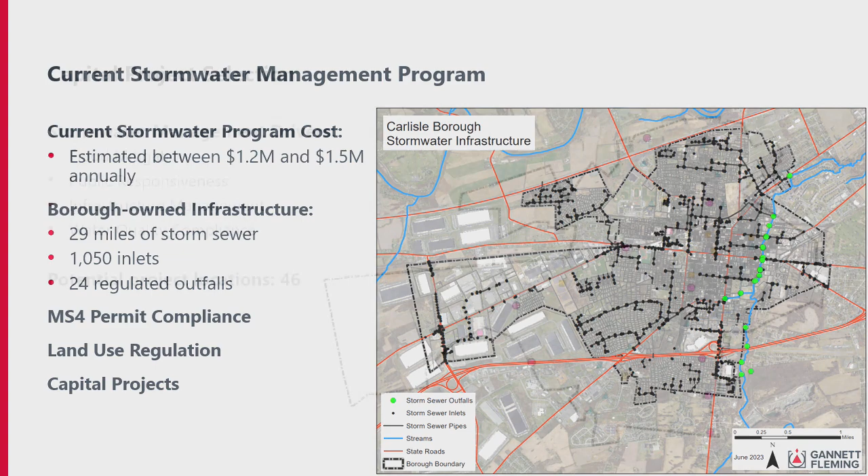Your drivers for stormwater management in the borough include flood mitigation - the Letort Spring Run has an impact, and we looked at how much backwater came out of the run and into the neighborhoods to see if that had much effect. We found it really did not, but it's something we were able to study. Public responsiveness is also a driver - you want to make sure that if someone asks a question about stormwater, or a developer or landowner has a question about what stormwater management means for them, you can respond to that.

Infrastructure management is about making sure that current investments, which might have a 40 or 50 year lifespan when installed, still operate as designed. That's the best investment: keeping what already exists working the way it's supposed to work.

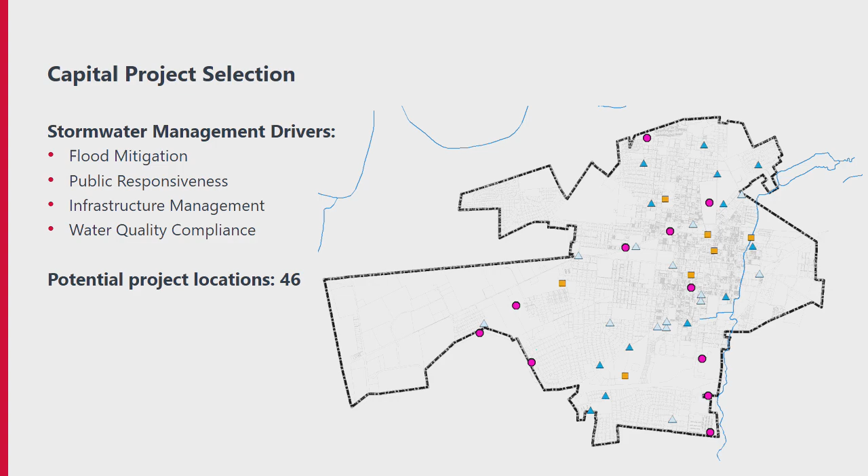And then there's water quality compliance with the MS4 program. We found 46 locations where there could be a capital project, in addition to all the other required activities. Some of those are based on the flood model, the watershed model we installed. Some are from emergency response, flooding reports from emergency responders that we brought into our database of projects. You can see they're sprinkled all throughout the borough.

We looked at some priority factors and general factors for how to prioritize those 46 locations. Some we were able to combine, since they share a piece of infrastructure, that becomes one project. So we were able to condense them and define them a little better.

These are the priority factors. They were weighted a little higher when looking at the stormwater management program, in determining what projects should rise to the top.

I wanted to point out MS4 permit compliance—I'll keep coming back to that tonight. I just want to throw a number out there: 158,000 pounds of sediment discharge reduction is the goal for the borough. That's one metric, and a lot of these others aren't very measurable, but that's one measurable responsibility the borough has for the MS4 permit. The rest have some subjectivity in measuring and prioritizing, but this was part of the factors we used.

These are the factors we used.

So where did this land? If you can see this, we've got seven different projects that landed as the highest priority. Some are water quality, some are flooding, some are community development—there's a big mix of different projects. We'll get into those 7 in a minute.

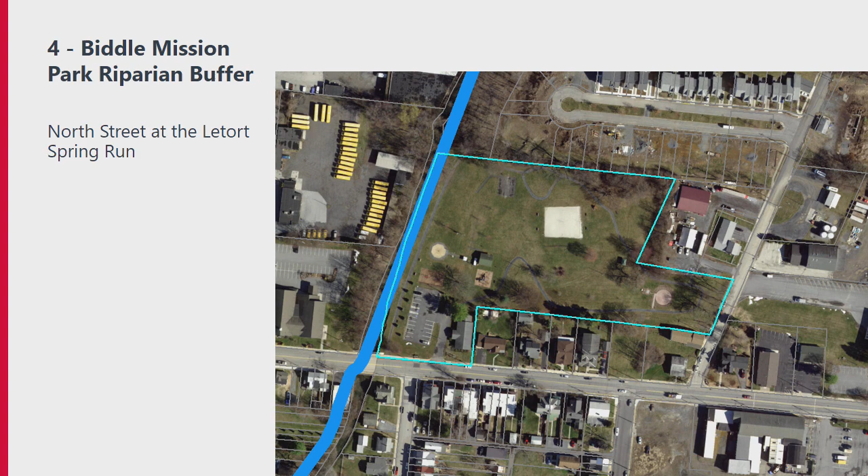This is already in the 2020 pollutant reduction plan that the borough adopted and was approved by DEP several years ago. If you look on the left side, the Letort Spring Run goes from south to north on this photo. Currently there's a trail right nearby, and so we saw that as an opportunity. It is in the existing plan to extend the riparian buffer, the stream bank buffer along that.

We took a look, and it's very stable at this point, relatively stable, so it's not a candidate for stream restoration. That's what a lot of municipalities are using, stream restoration, to make up their sediment reduction goals for their MS4 compliance.

But what it is helpful for is extending that buffer, moving the trail off the bank, reducing the intensity of use right on the bank, allowing that riparian buffer to stitch everything together, to suck some of the nutrients and sediment out of the stream as it goes by, improving aquatic habitat. Then what we would do is relocate that crushed stone pathway, about 500 feet of it that parallels the stream, off the stream bank, and limit stream access to allow that riparian buffer to really do more and gain that credit that the borough is looking for.

So there's that number. Remember that 158,000 pound number I was using before? This one gets you about 600 pounds of that. But we're going to get there.

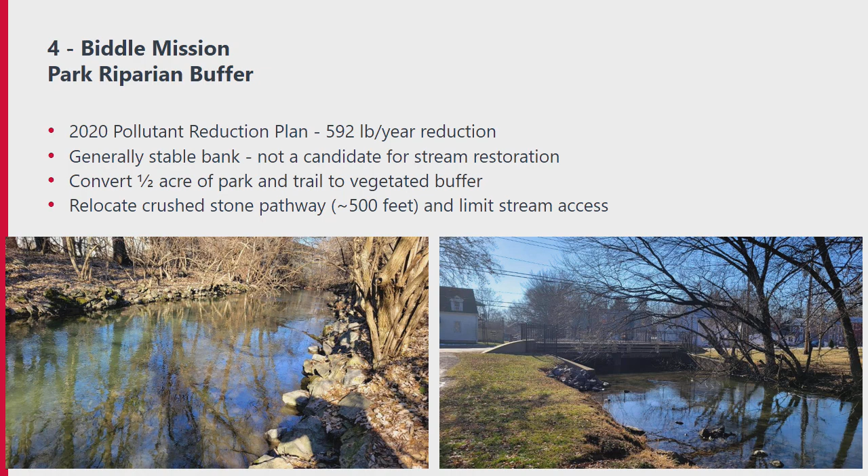And it's a dry detention basin. Water comes in, water goes out. Doesn't really have much of an infiltration capacity. Water coming in looks a lot like the water coming out.

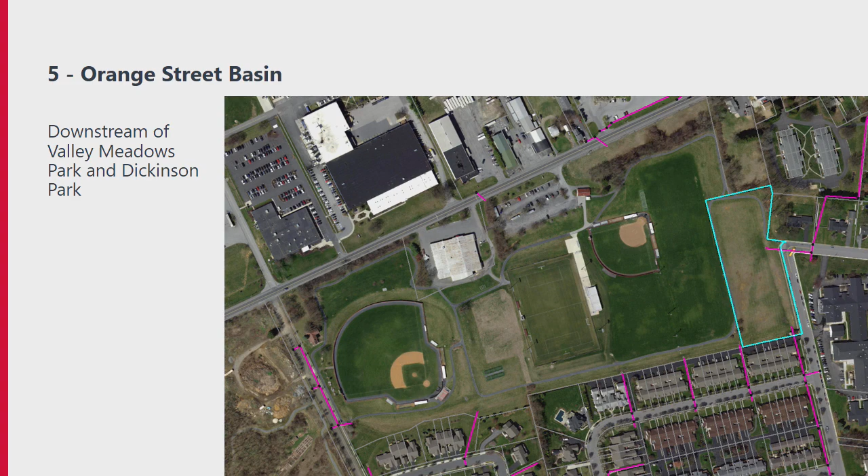And there's a lot of capacity there given that huge watershed area to change that around. I don't have the exact drainage area, but it's lots and lots of acres draining to that.

You use that basin differently, you naturalize that basin. And remember that 158,000 number? This is preliminary, this is what your pollutant reduction plan shows, but this is 60,000 pounds of sediment reduction coming from a facility like this. I don't know if we'll get to that number, it takes some study, but that is much more significant.

So it would convert it from a dry pond to a wet pond. There'd be more habitat there, different kinds of plants instead of turf grass. Right now that facility is really not used, so it would make it a more functional use of that landscape for water quality. You could also use it for education, which is part of the borough's goal for stormwater and environmental education.

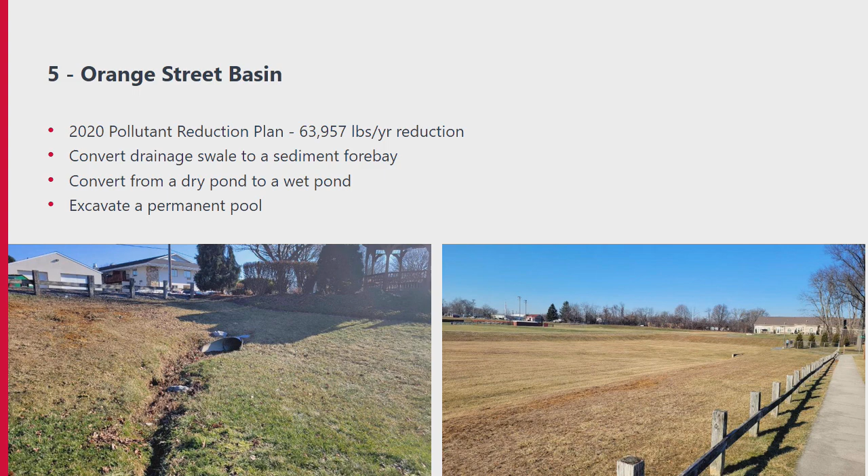It also has some potential to mitigate flooding downstream. That wasn't really a concern or a goal of this project, but it could help with flooding by just taking the top off those peak flows. So that's the Orange Street Basin. And then the third one we want to look at is Thornwald Park.

But there's potential there to simply restore stream banks, stabilize trails, add a few rain gardens, maybe put in some bioswales, maybe do some very significant excavation to create stormwater detention, retention, infiltration at this site because there's a lot of room. We don't know exactly, but there are multiple benefits for active recreation, for passive recreation, for public access, for flood mitigation, and for water quality.

So there's a lot that could be done here that we really think the public should be engaged in saying, what does this park look like in the future, and how can it be used for managing water in the future? So at public meetings, Thornwald Park is a wide open canvas of what could happen at this place. Also downstream is Walnut Bottom Road.

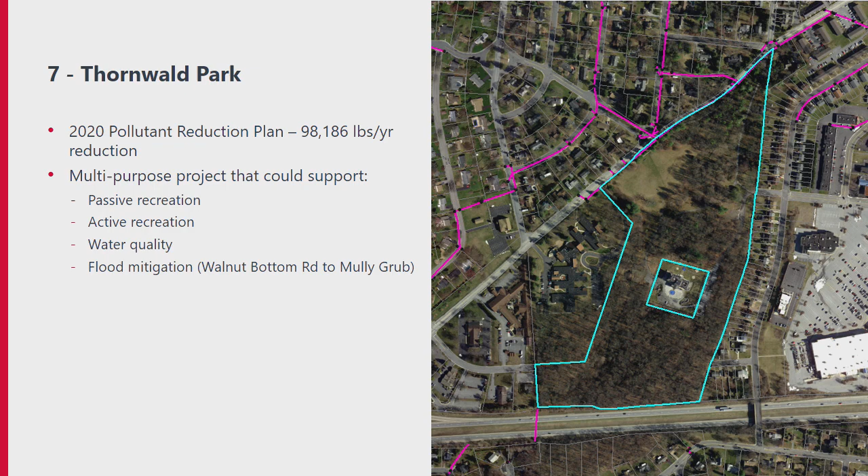There's flood mitigation because we know that downstream of this is another critical area for flooding. There may be ways to use this facility to mitigate flooding down Walnut Bottom Road as well. This is where this heads.

This is the number 6 that you were talking about before. This is the Mully Grub storm sewer. This is the water, the flood inundation areas as it goes through this neighborhood. Thornwald Park is off down to the bottom left, which drains up and into this area, and then it drains out to the right of the photo on the Mully Grub down by the park, eventually into the LeTort Spring Run.

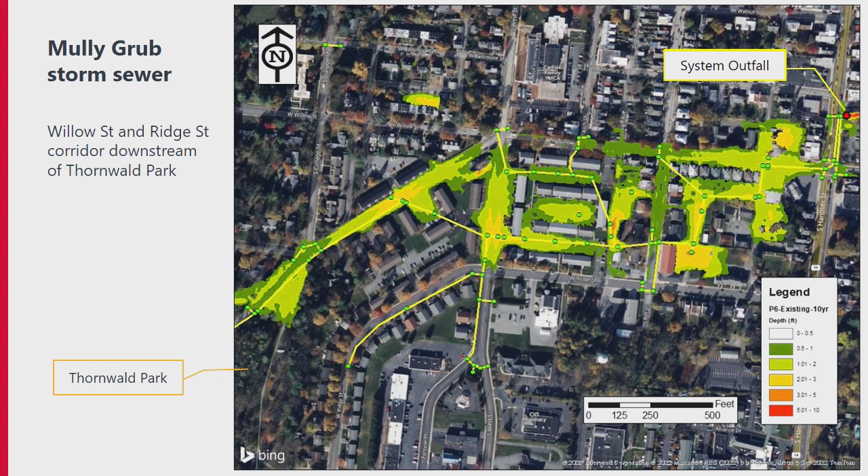So there's a lot of flooding that could happen here. It's a vulnerable area. One thing we did want to show you is the modeling that we did go through for mostly the entire east side of the borough. It's a model like this.

Please don't look at this, but our modelers can use this to say, hey, if we tweak this pipe here, or if we add an inlet here, or if we route water a little differently here, these models are powerful for areas like this to really say, this investment in this location will have this kind of impact downstream or upstream. So there's a lot that can be done here using the existing model that we've created over the last couple of years for the entire east side of the borough to dial things up and down to see how investments in infrastructure can impact flooding up and down the watershed.

So the recommended next steps: that will come in tonight with a stormwater master plan, the Biddle Mission Park, create an existing conditions plan, make sure you know where the wetlands are, the sensitive features, and then a plan for trail relocation and riparian buffer design.

The next one's the Orange Street Basin. Again, existing conditions plan, infiltration testing to see how much water can get put into that site, how much has to run off, and how much can sink down into the groundwater. You can just get rid of it that way. And then the design and the permitting for the earth disturbance would be the next step there.

And for Thornwald Park, again, existing conditions plan, but very different look, much higher level look at that. Concept design for what could be done: stream restoration, green infrastructure, detention, retention, infiltration, flood mitigation. There's so much that could be done there. But to get the right people out on site to walk that and see, these are some options for Thornwald Park, and then engage the public on those ideas.

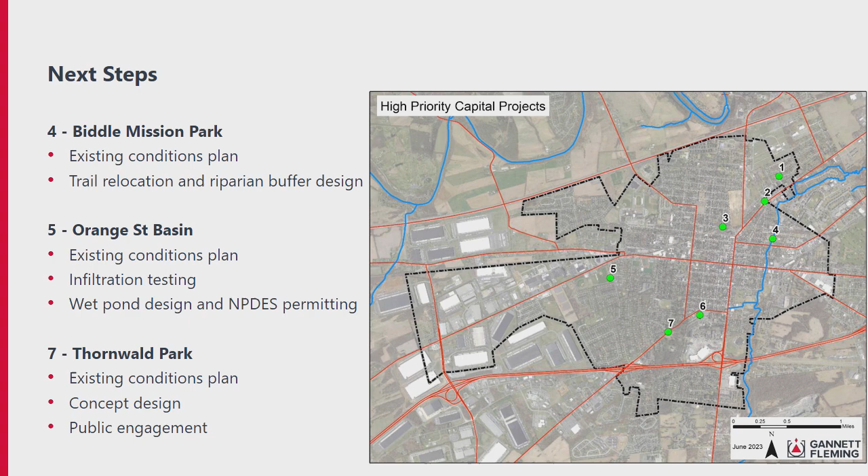So those are our proposed next steps. There's a lot more in the plan about the prioritization, about the borough's current stormwater activities, projections into the future, other activities that could be done as far as site assessment and asset management. But wanted to come with you, Mark, with some of these first 3 action items to start implementing.

Yeah, I would say that when you look at the borough's 2024 budget and its capital improvement plan, we incorporated all 3 of those projects in the allocated budget for stormwater management and also in the 5-year capital improvement plan.

Does council have any questions or comments? Go ahead. Just can you talk in general terms how much the projections for not total rainfall but intensity of rain are we using the most recent, and I'm sure it's changing every year, and do we have any areas in your mind we might want to continue looking at based on our knowledge that rainfall intensity is going to increase over the years?

Right. So, starting at the state level, DEP is supposed to update the existing stormwater management manual for Pennsylvania, but the 2006 version is what we're using. They've been revising that draft for the last couple years. Things have changed since 2006. We're waiting for that new manual to come out, but you can read the draft to see what new design requirements should be, and how there are old calculations for rainfall intensity versus how you should be using new measures for rainfall intensity when you're designing anything new.

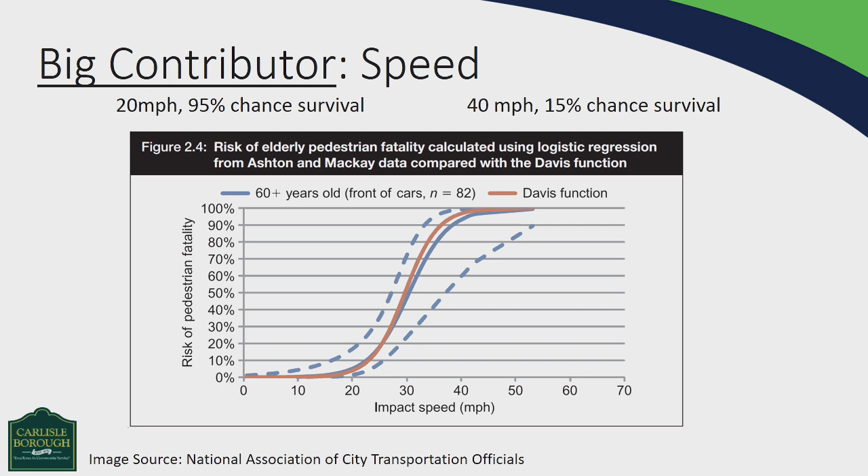So that's a very important thing to be thinking about: if we can just lower the speeds by a few miles per hour, we can greatly increase the chance that when there's a crash, the pedestrian survives.

At Meeting House Spring Road and Forbes Road, that intersection is really at the heart of that entire neighborhood, especially the neighborhood on the western portion. Almost every house there, a vehicle has to go through that intersection. On the eastern side, a large percentage do. That intersection is probably the busiest in that entire neighborhood.

We had a crash there last spring, and we've also had some resident complaints. Folks who are longtime residents of the borough have said that a lot has changed out there. A lot of new houses have gone in, and the characteristics and demographics have changed.

They're concerned about what used to be a very pleasant, quiet place to walk your children around now getting a little bit busier. So there's concerns not just about the crash, but for the future, and they want to maintain the ability to feel like they can walk safely within the neighborhood.

I also want to point out that the intersection is at the bottom of a hill. It's not a huge, really steep incline, but it is downhill, and naturally when you go downhill you pick up speed. That's just something that happens when you're in the vehicle.

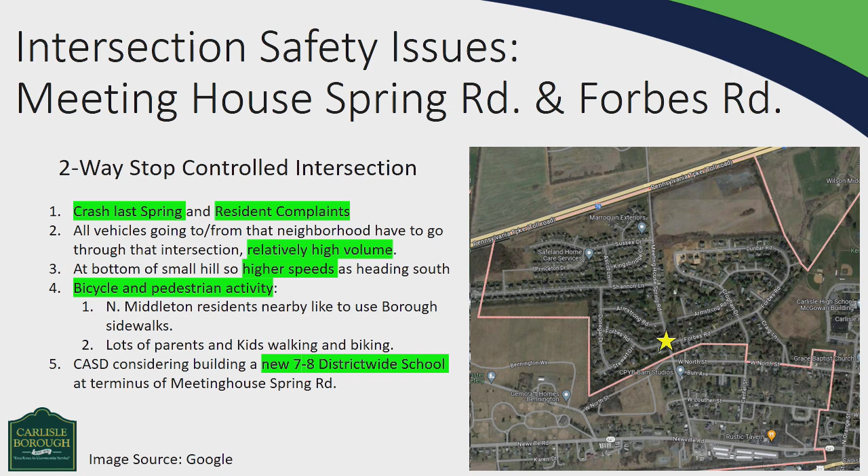As a side note, you can see the large undeveloped area adjacent to the turnpike in the northern part of that picture. That's a potential site for a new 7th and 8th grade district-wide school. If that happens, there will probably be quite a few changes to several intersections in this area. But for now, we know that's an issue, and we'd like to figure out how to resolve it. So why don't we just put up 2 more stop signs? Well, there are 4 good reasons why not.

First, we have to conduct an engineering and traffic study, because you can't just willy-nilly put up 2 stop signs. You have to think about whether that's the appropriate response, and whether it's the real problem you're solving. PennDOT has laid out an entire checklist for that traffic and engineering study, which includes warrants.

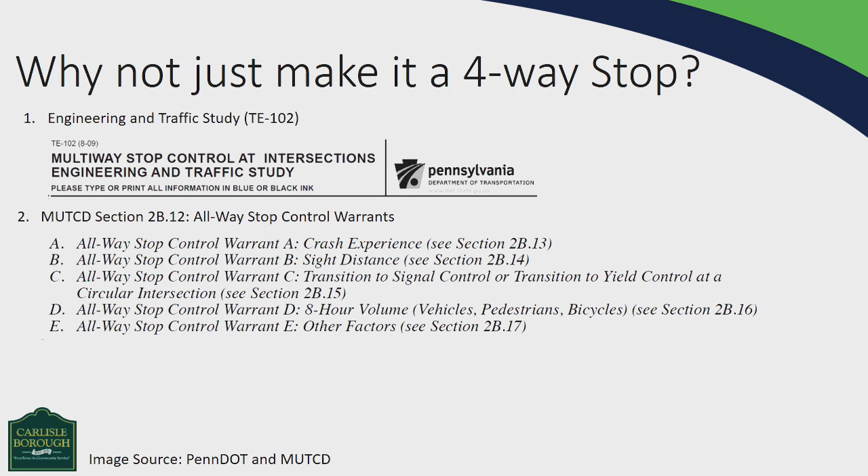There are 5 warrants, one of which is the volume warrant. That basically says there needs to be relatively equal traffic volumes on each approach for a 4-way stop to make sense. At this particular intersection, clearly the heaviest movement is on Meeting House Spring Road, so we don't think that volume warrant would be met.

Also, if you look at the guidance from the MUTCD, the Manual on Uniform Traffic Control Devices put forth by FHWA, they say clearly you need the least restrictive traffic control that provides safety and efficiency. The reason is you want things to flow — you don't want to have to stop someone if they don't need to stop.

And PennDOT has guidance that says flat out that stop signs should not be used for speed control. So just putting up 2 more stop signs doesn't really seem to be the right answer in this particular location.

So how do we get people to slow down so that we don't have bad outcomes when there's a crash with a pedestrian? Do we put more law enforcement folks there? No, I don't know if that was really going to work. Do we put a lot more signs, make the signs bigger? That's not a great option either.

The sad reality is that we need to remove decision making from the equation. We need to force the drivers through geometry to slow down. And how do we do that? We deflect them, either horizontally or vertically. Vertically, like with a speed bump, or horizontally with chicanes or other traffic calming measures.

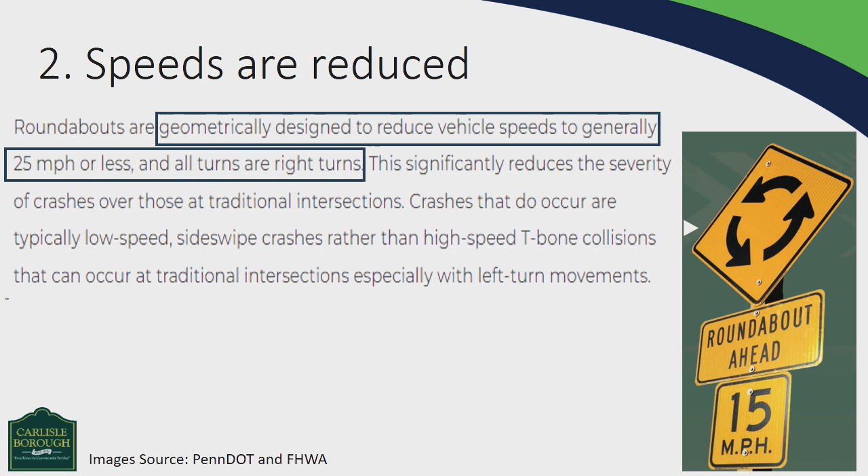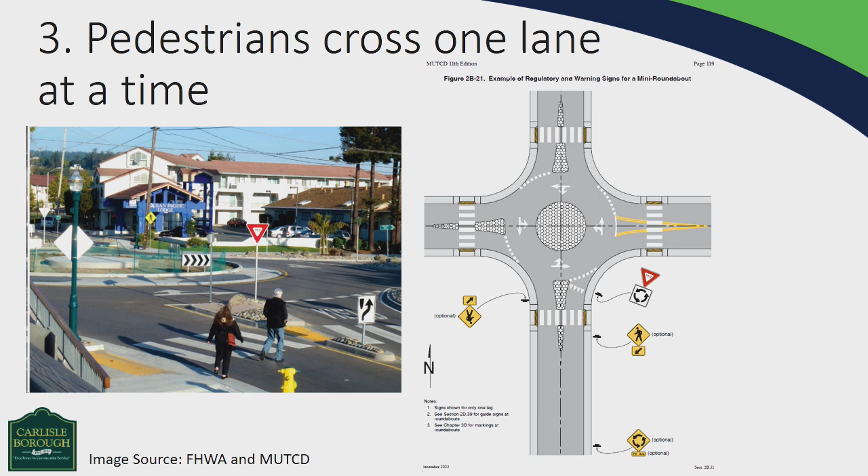Okay, so here's the third one: pedestrians cross one lane at a time. The reason they can do that is what's called a splitter island. You can see that all the circulating traffic is in the middle and the pedestrians are pushed to the outsides. You can put in a splitter island that orients the vehicle, already starting to make the turn to slow them down before they enter the roundabout. So the pedestrian can look one direction, say, nope, there's no traffic there, continue to the middle of the island, look the other direction, good, and proceed on, as opposed to having to look in lots of different directions all at the same time.

So what is a neighborhood roundabout? I apologize for taking that long to get to that, but you kind of need that context to understand why these things may or may not work.

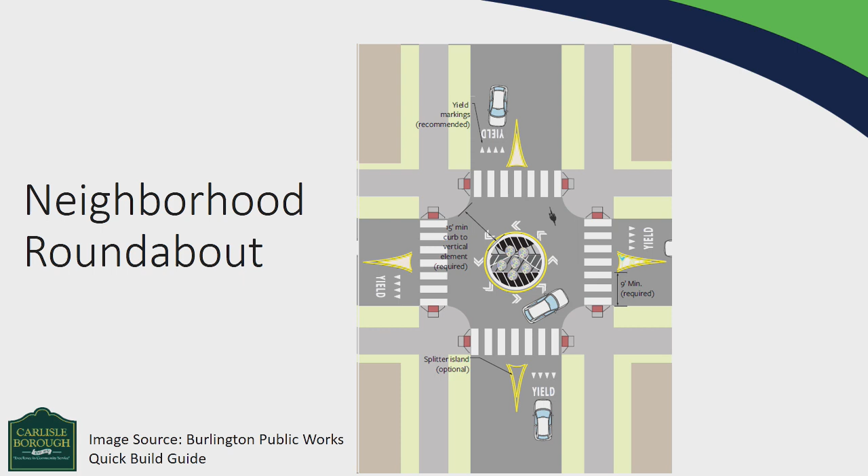The quick answer is they do work. So what Burlington, Vermont did is they said, all right, well, we know that the roundabout is a superior traffic control intersection device. But we don't have the money to go in and reset curb lines and retrofit all of our intersections to make them roundabouts, the ones that make sense. Is there a way to create a roundabout without disturbing the curb line? Because that's what's expensive. And they came up with this concept, which is shown here.

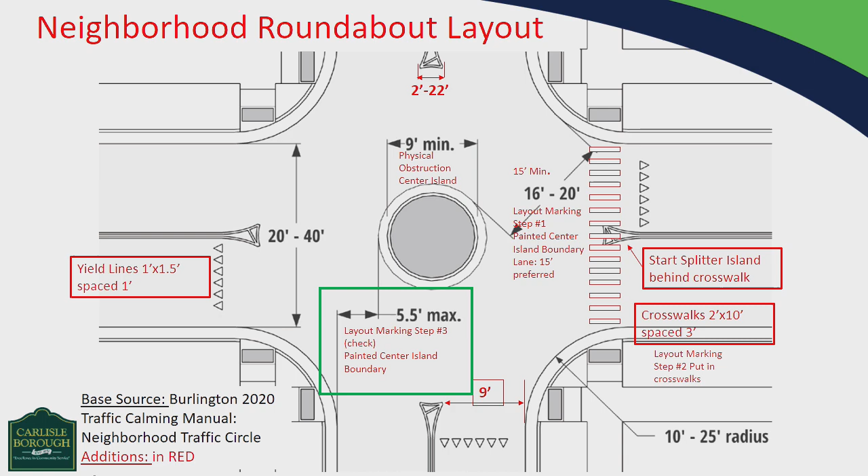As you can see, they've got several pieces of design criteria for how you should set this up. But there are two things I want to point out. One is that you'll notice the pedestrian crossings, again, are pushed to the outside of the circulation area. Number two is the green box: you want that center island to be pretty big. You don't want to leave too much space between the curb line and that center island, because then the vehicle could essentially just drive straight through. You need that island to be big so that they're forced to make that right turn and then curve around the center island.

So at our traditional intersections, where you've got the crossings right at the corners of those 4 radii, you can see where I have those 4 red arrows.

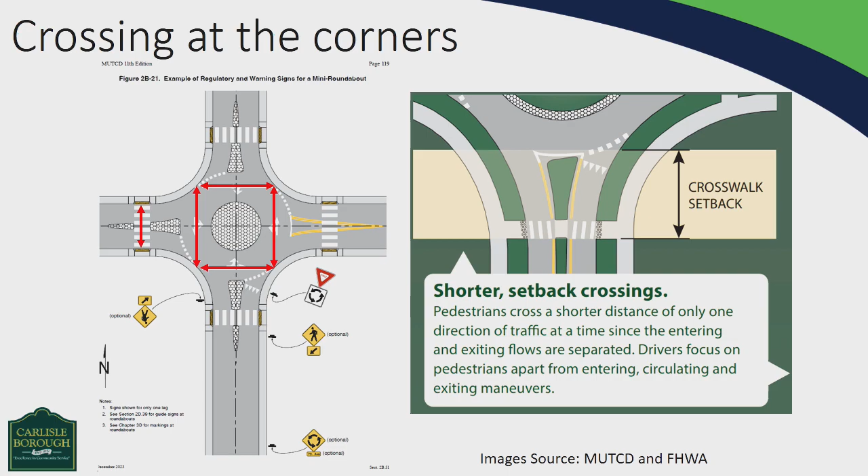You're literally putting pedestrians right in the middle of the travel lane. And that's why the roundabout design pushes the pedestrian crossings to the outside. So now we believe and know that these neighborhood roundabouts are good, but we don't have a situation where they can fit because our crossings are in the wrong place. So how do we deal with that?

This is just a further visual with a real intersection of why the crossing within the circulating traffic area just is not going to be safe. It also shows the 2 short red arrows where you can have the pedestrian looking for crossing one direction of travel at a time.

And that white vehicle there, which is circulating around, is literally driving in the crosswalk parallel to the crosswalk. We have cars going perpendicular to the crosswalk all the time, but cars going parallel is not a good plan.

So Mark and I discussed this, and in general, we don't want to create a crossing that goes diagonally. You want a crossing that goes straight across, because that minimizes the amount of time that the pedestrian is in the roadway. So straight across, good; diagonal, not so good. However, that might be the only way we can get around this particular solution because of the geometry of our intersections.

So essentially, the pedestrian leaves that corner of the radius, walks diagonally a little bit until they get to the splitter island, then walks straight across, then walks diagonally again. That's one option that we came up with.

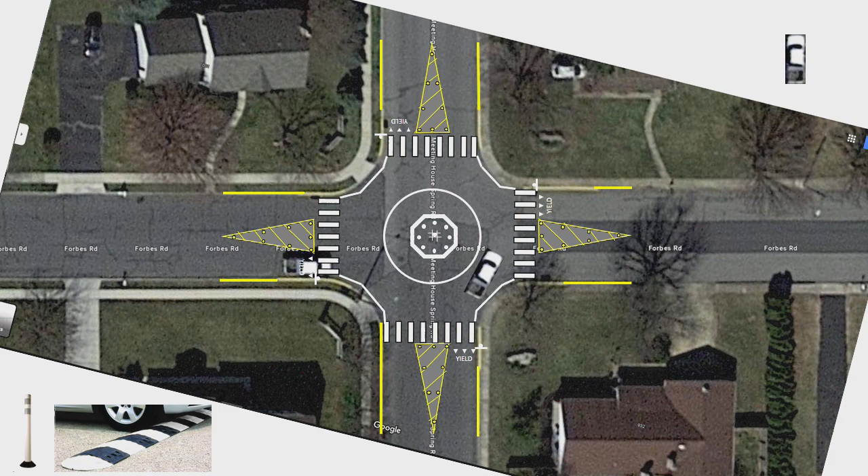Anything else? Well, and likewise strollers. Yes, strollers. Okay, thank you, Jeff. Thank you.

Next, we have a briefing on Safe Streets for All demonstration grant. Mark, are you handling that one? Yeah, okay, I'll take this very quickly.

So for the last 7-8 months or so, several borough staff members have been actively participating in Tri-County Regional Planning Commission's Safe Streets for All initiative. Jeff Bergson's one of them, Mr. Woolston also participates, and I think some of our police officers also go there. They've been working on potential projects to submit for grant funding. Very recently, so this is quite dynamic, and it may change from what I say now till next month, but we thought it would be helpful to brief you on this.

Tri-County Regional Planning Commission was in contact with Federal Highway, who informed them of a good pot of potential grant funding, and the active transportation, or the Safe Streets for All committee, was brainstorming potential ways of utilizing that funding for the region as a whole, and potentially came up with a project that would involve a collaborative among numerous municipalities in Cumberland County and in Dauphin County, submitting a joint grant application with Tri-County that would request funding to purchase equipment and materials for things such as Jeff just talked about, or putting in temporary bicycle lanes or other temporary measures that you then study.

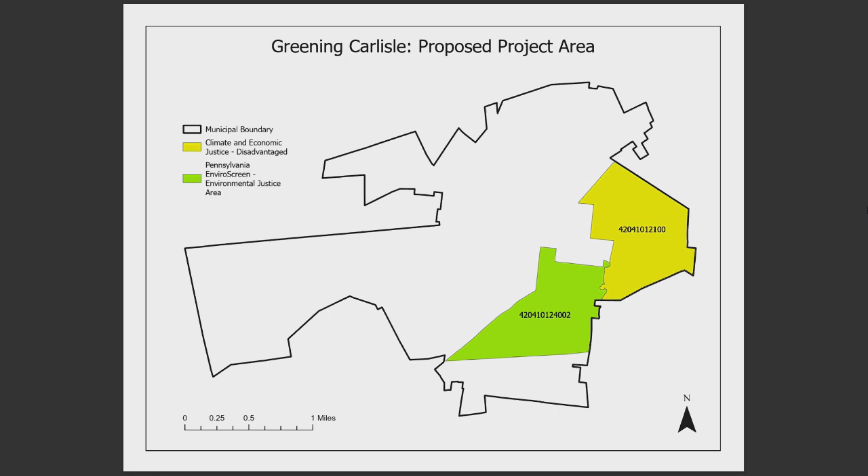Basically that would buy the borough about 300 trees and 5 years of maintenance. It would get us contractor support to install the trees and work with landowners, and it would also get us the opportunity for tree tender training for up to 5 staff or volunteers. I apologize to council for not telling you about this earlier, but this stuff moves pretty quick, and we wanted to act on the opportunity.

And there's no match. That's the big one. No match. Right. Questions, comments? Good job.

If you'll indulge me, since we're recognizing new folks - I know he's not here, but I know Jared has a new member of his team, and I'd love for everyone who doesn't already know who that person is and what they'll be doing. Sure.

So we hired a policy and GIS analyst to fill a vacancy in the borough in my department, and I hired Deb Sinha, who's still a professor at Dickinson College, to help us out with some of this stuff. I've been working with Deb for probably the last year.

Trying to secure funding through Dickinson College for a couple of different opportunities for students, he sent us Natalia, who helped us out with the East High Street program and analysis, and 2 interns with funding opportunities to pay those interns, who are currently working in my shop right now.